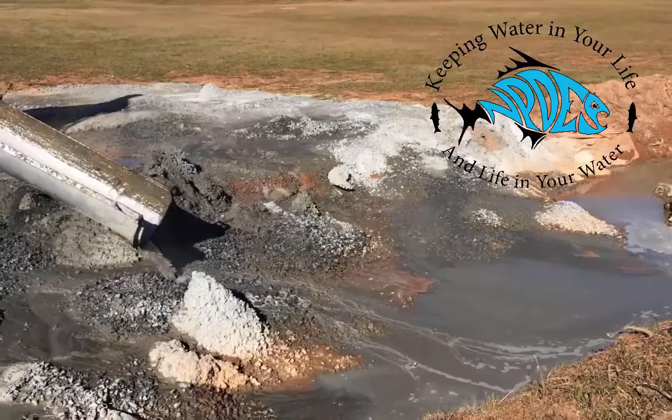Hey, this is Luke Owen with NPDES Training Institute, and today we're going to be talking about the Greenbook. There are a lot of changes that have occurred here lately, and as of January 1st, it's now official. And so I wanted to just cover a few things so that you all know what to expect this coming year and all that.

So anyway, if you're watching this video, you're watching it because at one time or another you expressed an interest in being certified in Georgia. I want to try to give you the information in a way that's going to help you understand how to use it in the field. And that's really the nature of what we do and what I do. I really work hard at trying to make this a program that people appreciate, number one, because it really does give us really good water quality and the ability to fish and all the wonderful things we like to do in the water, whether it's water skiing and that kind of thing.

But also as we're doing that, understanding that there's some liability out there associated with land disturbing activities and construction sites. And there's no need for it to be a harsh program. If you know what to do, you're doing the right thing out there, you're trying to follow the rules, then we all should be working together. This is my take. I really want people to be able to work together, because we all want clean water.

Of all the people I've trained, I've talked to a lot of people. I've never found one that says they like dirty water. And that shouldn't surprise you. It sure doesn't surprise me. It's just sometimes we disagree on the rules and regulations that govern those types of things. So we need to find out how to use these regulations in a way that's going to benefit our creeks and streams and also protect us as we're involved in a program, construction, that can actually hurt the environment if we're not careful with it when it does rain.

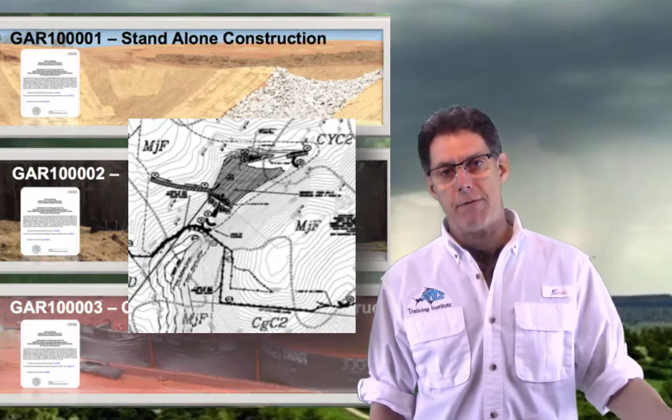We have another 5.5 months of using the 5th edition best management practices and that manual, and then also the new Greenbook, the 2016 version that we can go to. And with the little PowerPoint presentation that you're going to get at the end of this video, I'll give a little more explanation about the transition and what's happened over the last couple of years.

As far as the plan review checklist changes, there's a few that have to do with those 3 different checklists for the 3 different types of general permits, but there was another line item that was added to the checklist that had to do with buffers and variances.

And so if they wanted to put a line item in there that asks, is there an encroachment? And if there is an encroachment, is a variance required? So it's a good reminder for the plan reviewers and for the design pros to address buffers and buffer protection on land disturbing activities. So there are some other things that we'll be talking about, but I wanted to kind of end this little video just saying this.

As an American, I believe in the legal right to clean water. There's no way that you can look outside of the boundaries of our country and not know that it's a very effective program, and that to have the privilege of being able to go down and fish and swim and water ski and wakeboard in waters that are not highly polluted is a liberty in our country that we can never take for granted.

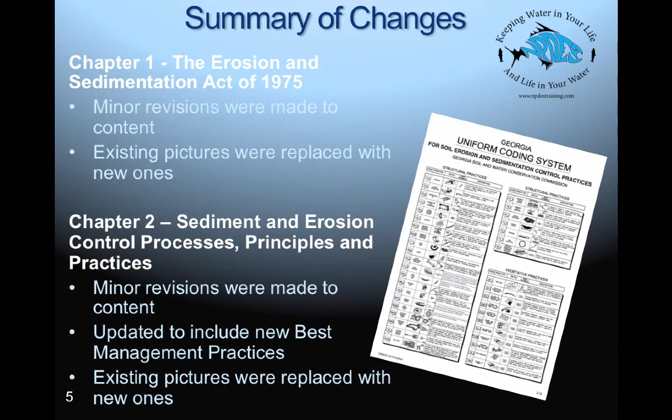In Chapter 1, there were minor revisions that were made that included changing pictures and things like that, just updates. The significant updates really did occur in 2014 to the Greenbook because it had been about 14 years since it had come out. Chapter 2, sediment and erosion control processes, principles, and practices, those were addressed. Again, minor revisions, changed a few pictures, that type of thing. Chapter 3, planning and plans.

Well, what they did here is they added low impact development as a section, and it needed to be added. Low impact development addresses the impervious surfaces within an urban area. And to be able to put a little bit of that water back into the ground rather than shoving it down to the bottom of a creek where it scours and causes a lot of erosion and property damage, it's an effort to try to infiltrate. And by doing that, you're removing the pollutants from going down to a creek. Also, there were things that were addressed in the state law.

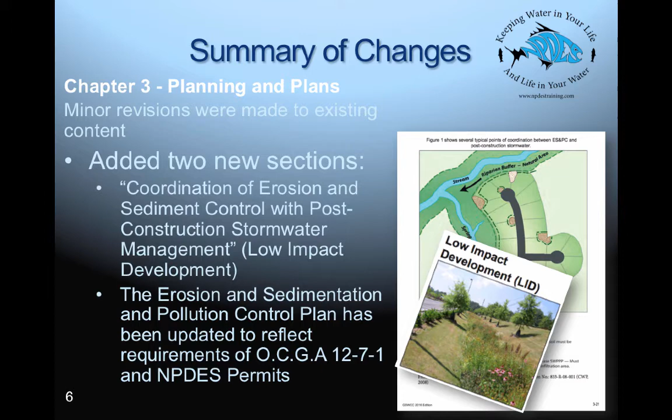The summary of changes that occurred to Chapter 4 were programs and process by which a city or a county becomes a local issuing authority. A person that's working for a city or a county that has chosen to adopt the state law into the ordinances, they actually enforce the state law on a local level, and they do that a lot of times through local permits. They do have the authority to step on a site wherever there is any kind of land disturbance going on as defined in the Act, and address those things. So that's talked about in that section. Highly recommend you read that.

And then sources of assistance and resources. Basically what happened here, a lot of changes. Why? Back in 2000, the internet wasn't such a big deal. It is today. In the 6th edition, it just addresses how the districts, the soil and water conservation districts, the Georgia Soil and Water Conservation, the EPD, how those district boundaries have changed.

And of course, the economy, when it went south on us back in about 2008. So anyway, these are changes that you can see here and click on to get information that you might need to have. Now, here we are at Chapter 6. This particular slide is just going to summarize what's changed. After this, we're going to actually address each one of these categories.

The revisions, I've just thrown up a couple of examples here where sediment barriers, the actual uniform coding symbol of SD1 is not changed, but the Type A, the Type B, the Type C silt fence that we're so familiar with is being addressed here as sensitive and non-sensitive. We'll talk more about that here later. There were absolutely new BMPs that were added. A few of those are represented here as a seep berm and a temporary sediment trap.

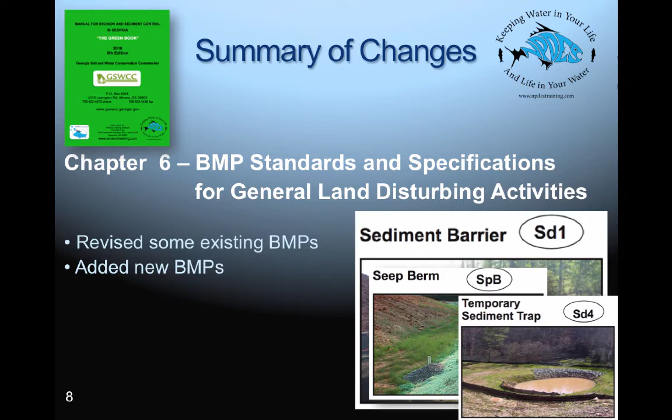This one, the removed performance criteria, that again kind of gets into what happened in the past when the 2014 Greenbook came out. There were some folks that didn't quite like what had happened. And so a lot of that stuff was removed. And so we do definitely have a better Greenbook now than we had with the 5th edition. So just testing standards were removed for the most commonly used BMPs.

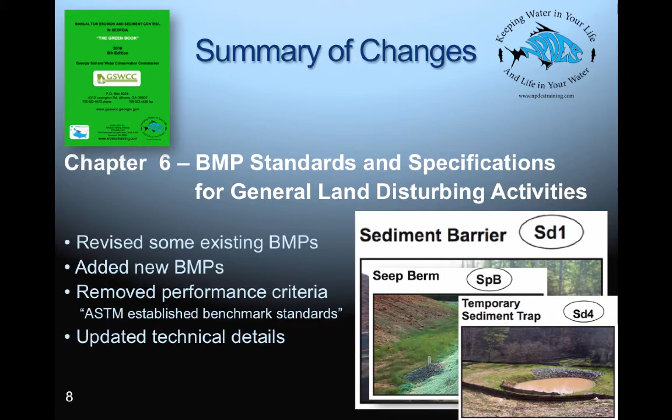And then along the way, technical details of BMPs, since so many things have changed. More alterations of BMPs like tackifiers. You know, there's 5 different types of tackifiers. Those types of things are addressed in the new Greenbook. And like I say, we'll see what those are.

So getting into what the revisions are, there's basically 4 BMPs that were revised. We'll see each one of these in more detail. But matting and blankets has actually been taken out of the 6th edition Greenbook. And it's been replaced by slope stabilization products. And you could read more about that on page 6-69.

Tackifiers and binders. Tackifiers, TB, that uniform code symbol is no longer there. It's been replaced by TAC. Polyacrylamide is no longer a standalone BMP uniform code symbol. You will not see it. And since polyacrylamide is used two different ways, one is a tackifier and then one is a flocculant coagulant, it was split up. And then sediment barriers, like we already mentioned, into sensitive and non-sensitive.

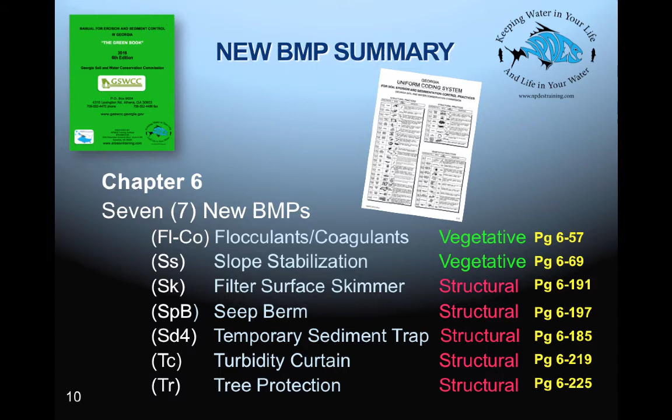So when it comes to the new BMPs that were actually added to the Greenbook, here they are. We had two new vegetative BMPs, referred to here as flocculants, coagulants, and slope stabilization. And then we had others here: surface skimmers, seep berms, temporary sediment traps, turbidity curtains, and tree protection that were added to the 6th edition.

The testing standards that were removed from the Greenbook involved check dams, channel stabilization, slope stabilization, tackifiers, sediment barriers, and inlet sediment traps.

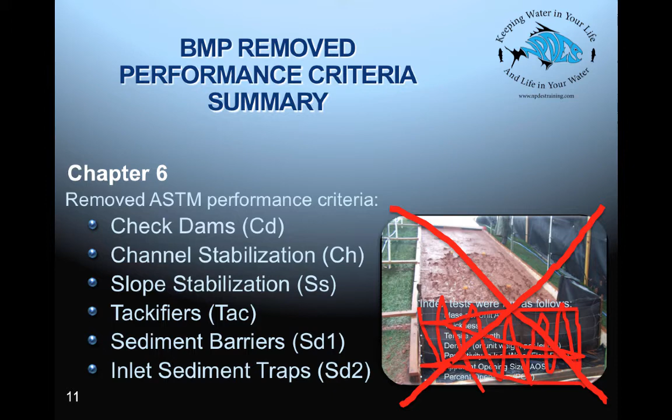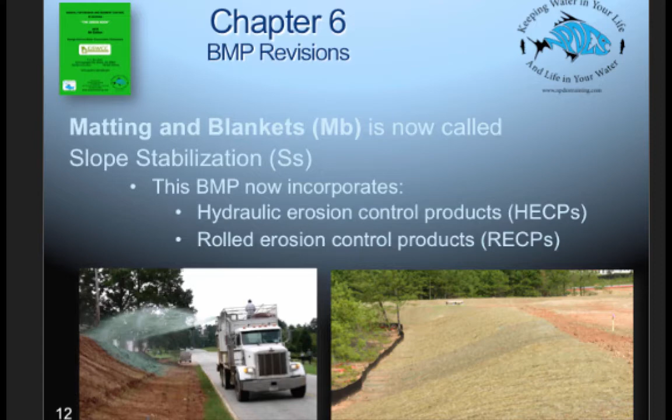So talking about matting and blankets, they're now, of course, called slope stabilization products, and basically kind of split it up into two different types of mats and blankets that you can use. So to stabilize a slope, you can use hydraulic erosion control products and rolled erosion control products. In these particular BMPs, you really need to look at the manufacturer's specifications for installation and maintenance of those.

When it came to these new BMPs, a lot of technology has come about, and it's really good that Georgia picked up on that. And so they've addressed that by making sure that there's a lot of different variations of some of these BMPs that are very commonly used. So tackifiers and binders, again, that uniform code symbol was removed and replaced with tackifiers. The new Greenbook, 2016 Greenbook, actually has added 5 different types of tackifiers, TAC 1 through TAC 5, and we'll talk about those in a little more detail here.

Synthetic polymers are addressed as TAC 1, organic polymers is TAC 2. The practice is intended for direct soil surface application to sites where you need to establish vegetation in a pretty timely fashion. It may not be feasible or where vegetation cover is absent or inadequate. Such areas include construction areas where plant residues are inadequate to protect the soil surface and where land disturbing activities prevent the establishment or maintenance of vegetated cover.

When it comes to maintaining these 5 different variations of tackifiers, the Greenbook states that the tackified areas need to be checked after every rain event. And that's absolutely true with the experience that we have here with tackifiers. Of course, rain can maybe get underneath an area that was treated and cause some problems.

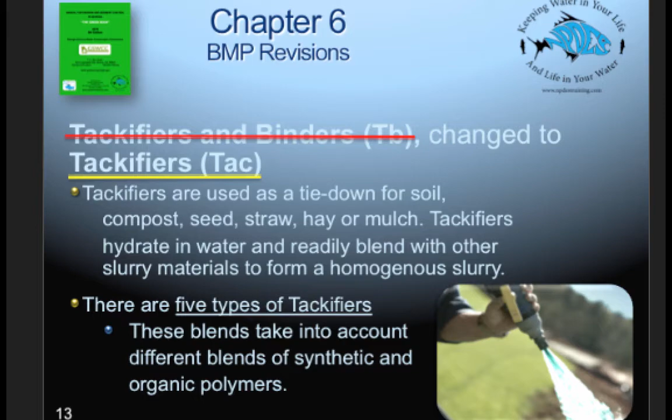So you just want to make sure that you're staying on top of it. And then periodically inspect them. People walk on them. As you put a tackifier on the soil, if they're disturbed, then that can create some problems if it rains. Just reapply the polymer every now and then as you need it.

First variation of tackifiers, type 1. Synthetic polymers, their application rates need to conform to the manufacturer's guidelines like they all do. Anionic forms of PAM, polyacrylamide, is really a big deal. Anionic polyacrylamide is a negatively charged polymer, and it's environmentally safe in the sense that it does not attach itself to fish gills. It does a great job of attaching itself to sediment particles.

Of course, polymers can also be used to anchor mulch. So if you use anionic polymers incorrectly, you can still cause some damage. So it's real important that you follow the manufacturer's specification with all of these polymers to make sure that they're not going to cause any damage.

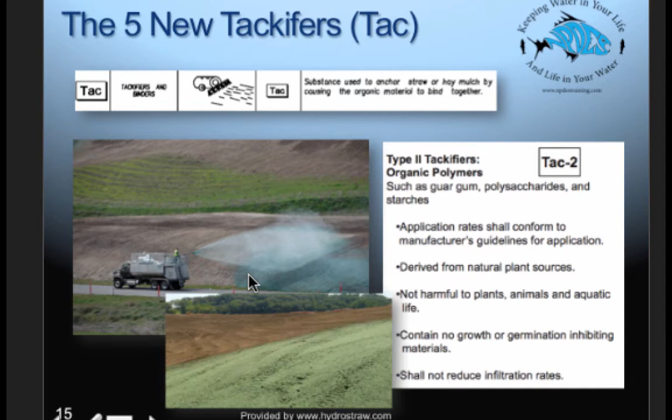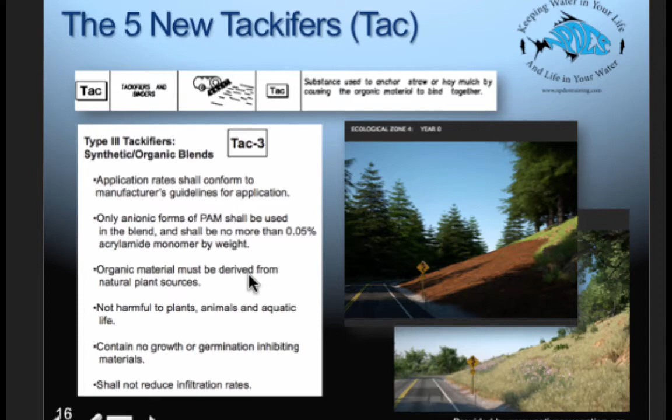Type 2 tackifiers are organic polymers. So you'll see here in the next few that there's a combination of synthetic and organic. Another application is synthetic and organic blends, as already mentioned. Again, only using the anionic form since it's environmentally safe. And make sure you follow the manufacturer specifications for mixing and that kind of thing.

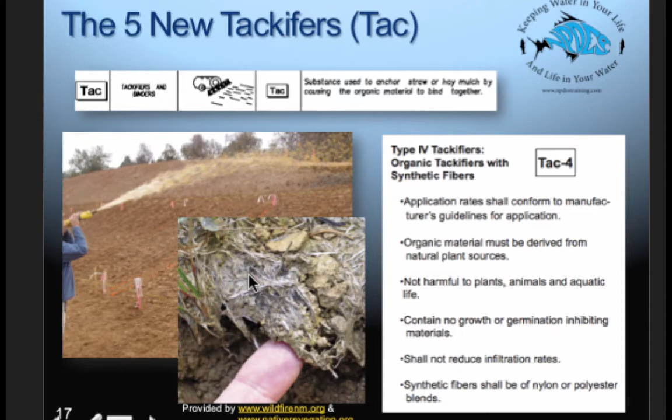The next one, type 4 tackifiers, is organic tackifiers with synthetic fibers. Application rates need to conform to the manufacturer's specifications. Organic material must be derived from natural plant sources. Then type 5 is synthetic and organic blends with synthetic fiber. Very much the same thing. Just want to make sure that you apply it correctly and that it does match the soil type. It can really help keep sediment out of the creek.

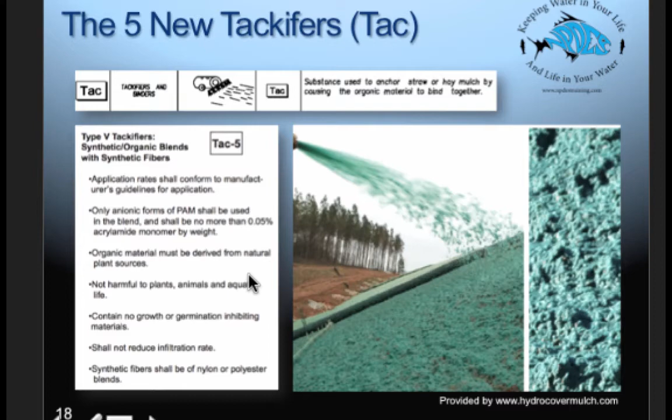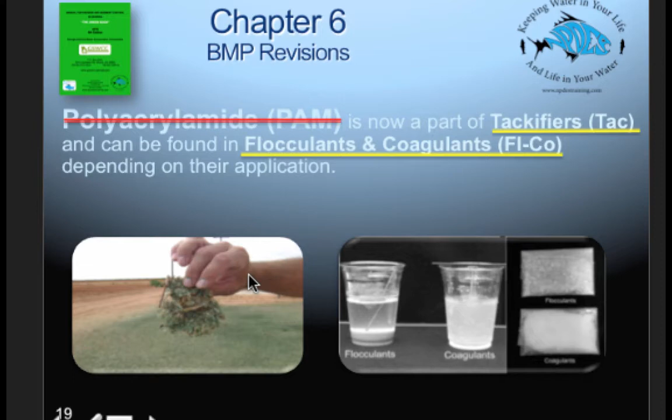The next one, PAM, as we already mentioned, polyacrylamide is now part of tackifiers, which we just discussed, and can be found also as a flocculant and coagulant. You can see here on the right-hand side of the slide, you have flocculant and/or coagulant, where it actually does remove suspended sediment from the water and causes it to be a sticky type of product where you can filter it. And as you can see here on the left-hand side with that glass, it settles quickly too. So you're essentially making a floating clay particle into a sticky, heavy sand grain.

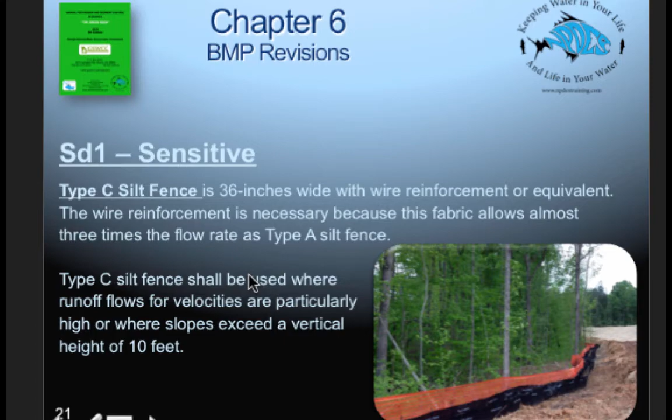Sediment barriers, as I mentioned earlier, type A, type B, type C. Type A and B are considered non-sensitive, and type C is considered sensitive. Sensitive barriers, nothing's really changed there, 36 inches wide with wire reinforcement or equivalent. The wire reinforcement is necessary because the fabric allows almost 3 times the flow rate as a type A silt fence. To have that structure behind it really helps a silt fence stay in good shape. And as you can see with this picture here, the buffer behind there was beautiful. Never got an impact from any discharge, although it was down from a very steep cut and fill slope.

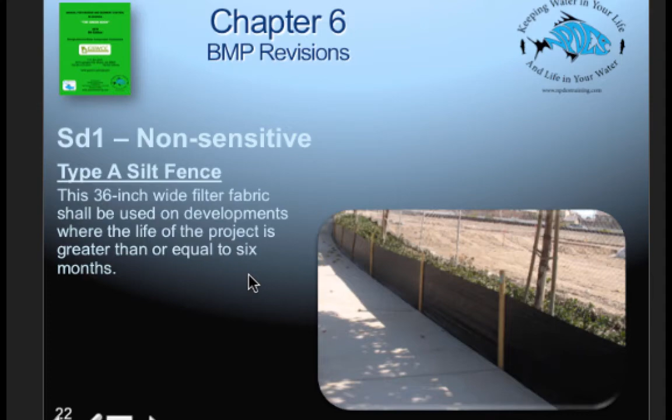Type A silt fence, 36 inches wide filter fabric. You can see here with the stakes, it's on 6-foot centers, no wire reinforcement. And then type B silt fence, it's a smaller silt fence. It's not as tall. As you can see here, only 22 inches wide. This filter fabric allows the same flow rate as a type A silt fence, but it's just smaller. And of course, the application of this would be limited to minor projects or around small building sites. Type B silt fence is very appropriate for use inside of common developments, residential as well as commercial developments.

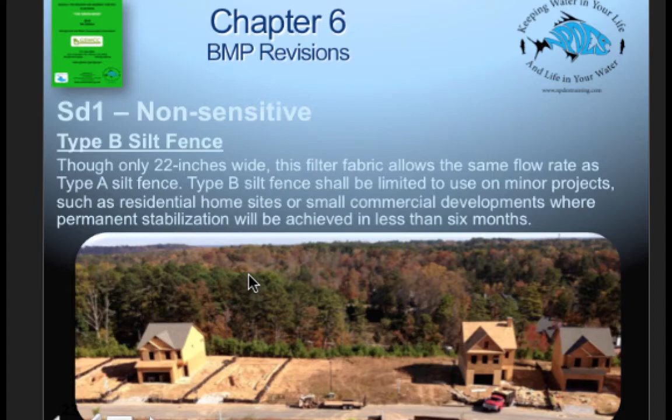Floating surface skimmer devices. This has been written into the general permit when it came out, and it is a federal rule. It's not just something Georgia deals with, it's something everybody in the entire country now has to deal with. And there's certain manufacturers of this, but we really have some pretty lenient ways of applying this technology to our construction sites. We just want to make sure that we do install them correctly, and they actually are going to dewater appropriately.

There's 2 things you're trying to do here with a floating surface skimmer primarily. You're trying to dewater at a slow pace so that it doesn't cause a lot of scour and erosion as it leaves the pond. And of course, you're trying to dewater from the surface. And by doing that, the thought is that you're taking cleaner water on top, where some of the heavier solids and clay, if it's had time, has settled to the bottom.

So it's a pretty good thing if you can install them and maintain them correctly. We actually have a sediment basin class that we've offered twice, been very, very well received, and it's only getting better and better. We've got one coming up here in March, so we're excited to be able to have that.

And it'll really do a great job of teaching you how to install them and how to maintain them, instead of having to walk out there in the middle of a mud bowl where they might even be buried, just how to take care of those in an effective way. And different types of things to consider as you're designing.

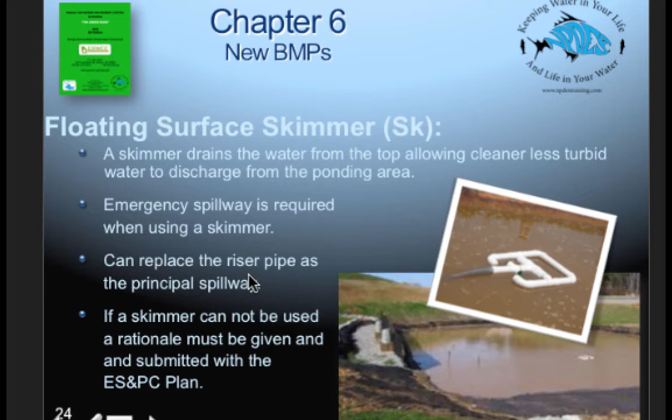Seep berms are a new BMP. They're essentially a long sediment basin, but yet they don't have an outlet where you just discharge directly through one hole orifice. You actually have several places along the way where it's going to seep into the subbase, and that's a great thing. That really does eliminate a lot of potential problems when you discharge from just one hole, an outfall from a detention pond, a temporary sediment basin, or a permanent detention pond.

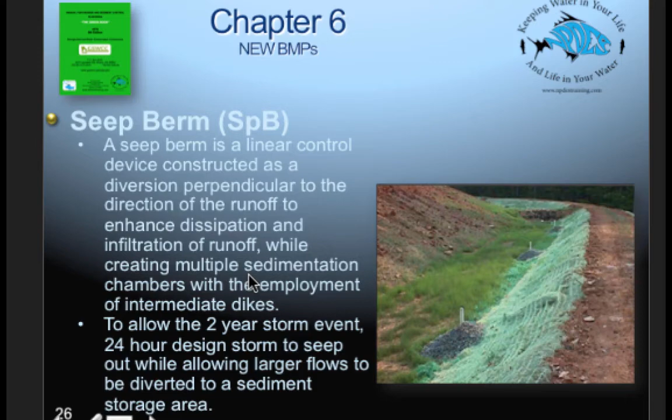So it's a linear control device constructed as a diversion perpendicular to the direction of the runoff. As you can see here at the base of a cut and fill slope, this can surround the construction site. It basically allows the contractor to open up the entire site at one time when you've got this seep berm around it. So when it does rain, it wouldn't leave the site from one place. It would just run off and be captured by the seep berm.

The specifications for seep berms, of course, are found in the Greenbook and address the top of the berm in feet, the bottom of the berm elevation, the top of the berm width, the height, the seep pole diameter, and distance from the top of the berm to the seep pole to be placed in accordance with that 2-year 24-hour storm.

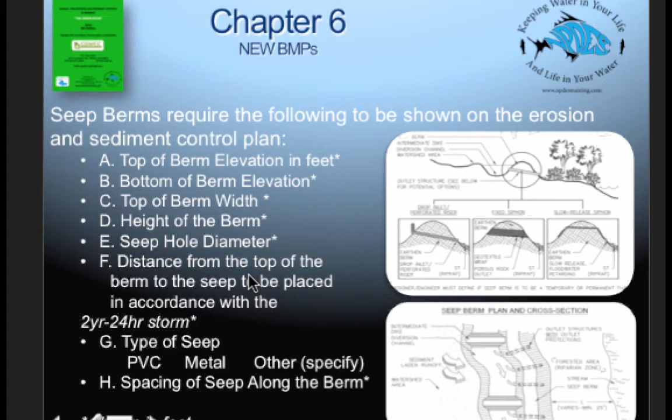Sediment traps, SD4s, are a welcome BMP to Georgia's Greenbook. Many people, unfortunately, were installing temporary sediment basins as sediment traps, and there wasn't really any clear guidance on how to do that. And so this basically is a device that you have to be very careful where you put it, because it can definitely overflow pretty rapidly. You don't have any kind of an outfall from this.

It just captures the water, and then the design, as we'll see here, 3 basic types of design will allow it to overflow over certain types of structures to help prevent the erosion and kind of control the flow. So for a temporary sediment trap, that's SD4-A, limited to small areas, less than an acre. The maximum lifespan is 6 months. And silt fence, straw bale barriers, and grass filter strips are used to polish the overflow waters, to help remove the sediment from the device.

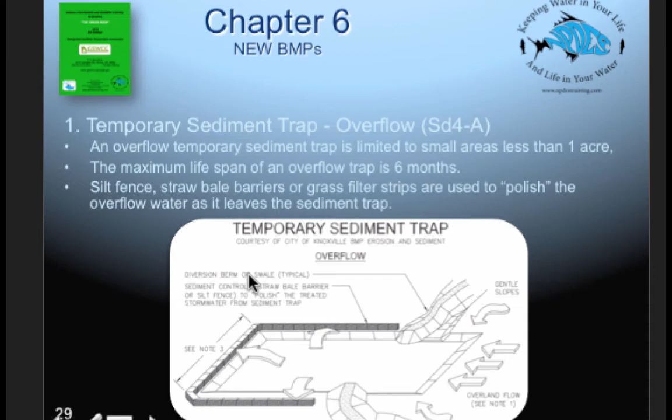With a temporary sediment trap, that's a combination outlet, SD4-B. The combination outlet uses straw bales and silt fence to dewater it. Proper installation and staking of the straw bales and wire backing of the silt fence are required for the materials to resist 1 foot or more of ponded water. The combination straw bale and silt fence outlet is limited to 1 acre of total drainage area and has a lifespan of less than 1 year.

So that's a pretty good duration for a device like that, as long as you maintain it, and that's the key. And then this type of device requires a lot of maintenance though. And as I mentioned, all of these BMPs, if you don't maintain them, they're not going to work. And so a developer, the permittee, really does have to go into installing and maintaining BMPs knowing that it's going to cost a little bit of money, especially with years where you've got a lot of rain. And since we just came out of 2015, we got hammered here in the last 6 months, so it's been a challenge.

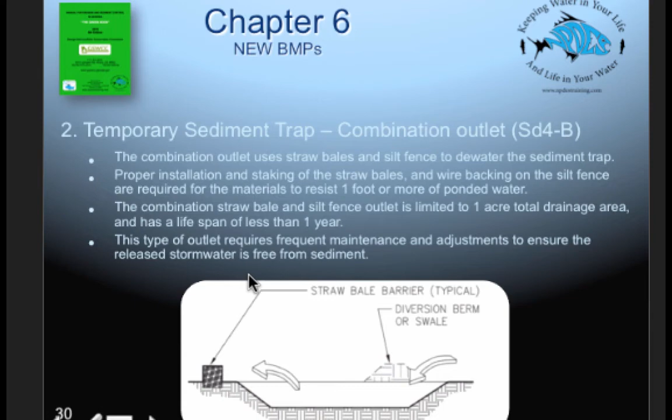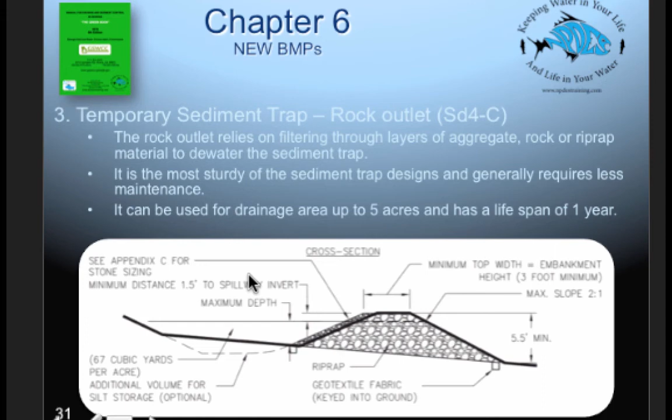With SD4-C, the rock outlet relies on filtering through layers of aggregate, rock, and riprap to dewater it. Again, it kind of polishes it. It is the most sturdy of the sediment trap designs and generally requires less maintenance. It can be used for drainage areas up to 5 acres and has a lifespan of up to 1 year. On temporary sediment traps with rock outlets, the rock outlet relies on filtering through layers of aggregate, rock, and riprap.

It's the most sturdy of all of them. Turbidity curtains, another BMP that's welcome. We didn't really have anything like this, and we certainly needed it. A floating or stake barrier installed within the water. It may also be referred to as a floating boom, a silt barrier, or a silt curtain. It's not to be used as a sediment storage device. Again, there's only certain BMPs that we can use for sediment storage calculations as design professionals.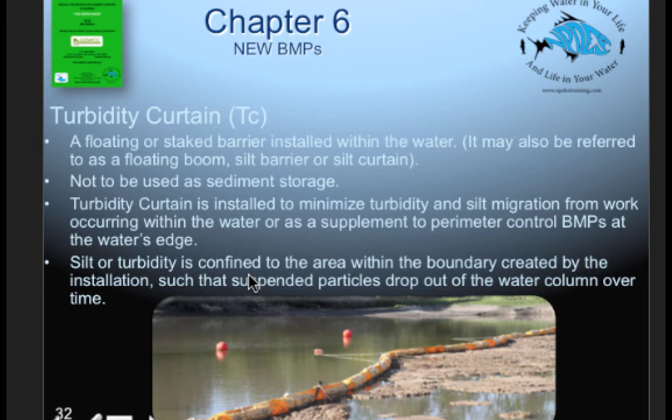Turbidity curtains are installed to minimize the turbidity and silt migration from the work area into a water of the state or U.S. water. And of course, it's illegal to discharge pollutants into a water of the U.S. beyond a certain limit, and Georgia has some very strict limits on that. Silt or turbidity is confined to the area within the boundary created by the installation. So any suspended particles that want to get away are going to be kept back closer to the site because of the curtain. It's a great BMP. Here's a little more detail about it that you can find in the Green Book.

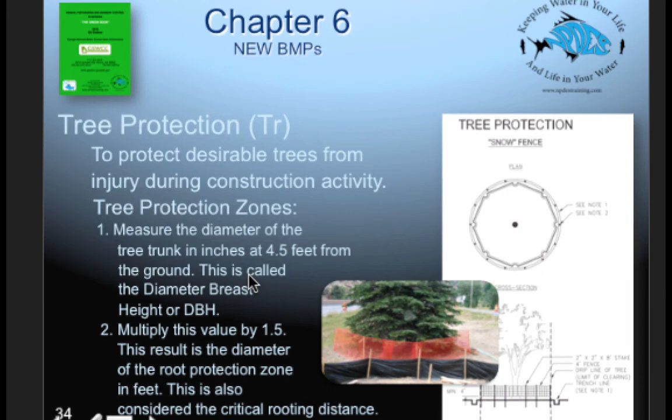And then tree protection, that's another BMP we really needed to have, and it gives specific directions on how to install and maintain these best management practices to protect trees and tree save areas.

Okay, last but not least, we actually have a new procedure. It's a brand new procedure on using alternative best management practices. The 5th edition Green Book really didn't have a great way of dealing with it. But the 6th edition that came out in 2014 was pretty good. For the most commonly used BMPs, people were going to have to get them tested before they could be used and really prove that they were going to do their job. We don't really have that type of rigorous test, but we have some pretty serious tests here for being able to add a best management practice onto the qualified products list in Georgia.

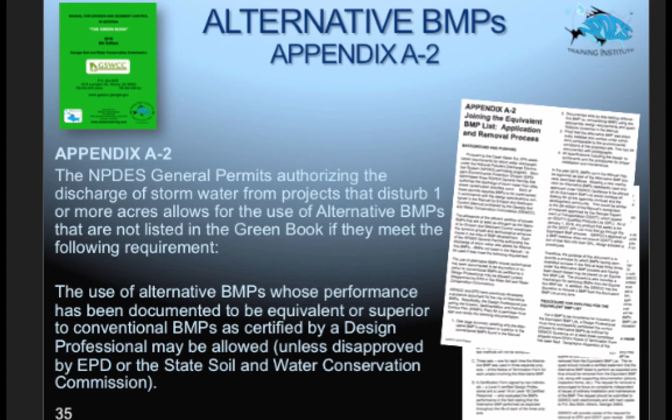So as it mentions here, you can read the text a little bit. I've made copies here of what Appendix A2 looks like. I highly recommend that everybody read this, especially if you're a design pro that wants to put in new BMPs. Each of the NPDES general permits, and we have 3 in Georgia that authorize the discharge of stormwater, that would use BMPs not listed in the manual have to follow a certain procedure to be able to add BMPs consistently to their projects. The use of alternative BMPs whose performance has been documented to be equivalent or superior to conventional BMPs, as certified by a design pro, may be allowed if you follow the procedure.

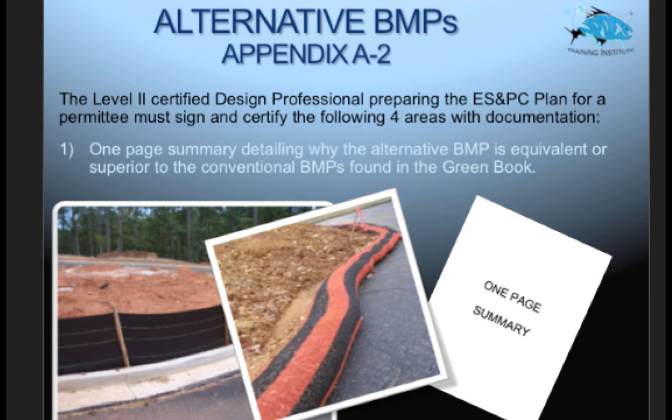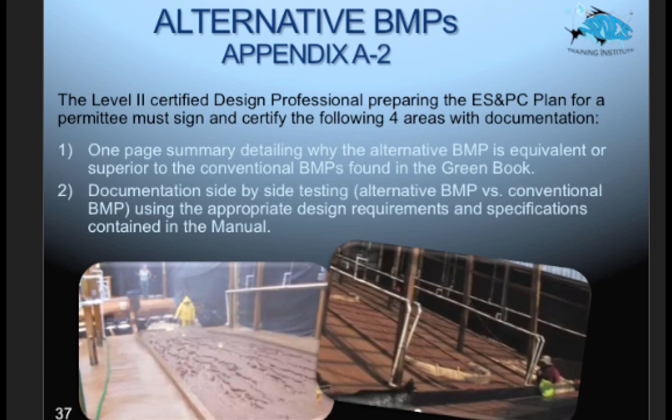So what is that procedure? Well, the first thing you need is a 1-page summary that details why the alternative BMP is equivalent or superior to the conventional BMPs found in the Green Book. The second step is documentation: side-by-side testing of alternative BMPs versus conventional BMPs using the appropriate design requirements and specs contained in the manual for erosion and sediment control. And then you need proof that the alternative BMP was previously installed and worked. That proof doesn't have to be a lot of rigorous tests and can be documented with photographs. So I suggest that you contact the Georgia Soil and Water Conservation Commission.

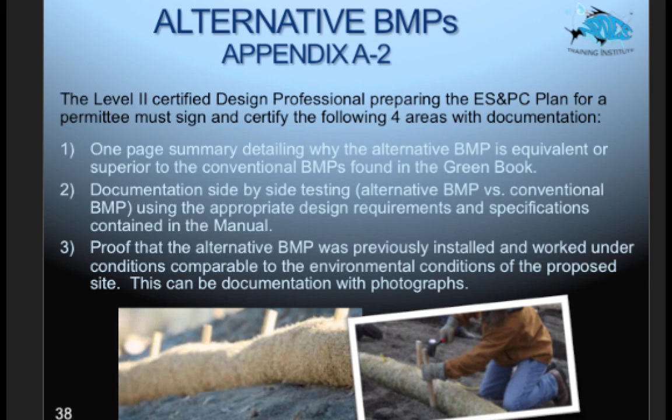And then step 4 is that all specs, including the design requirements and the procedures for proper installation and maintenance, need to be identified. And the BMP has to be used on 3 projects where a successful notice of termination has been submitted. And there's a lot more detail, again, in the appendix of the Green Book.

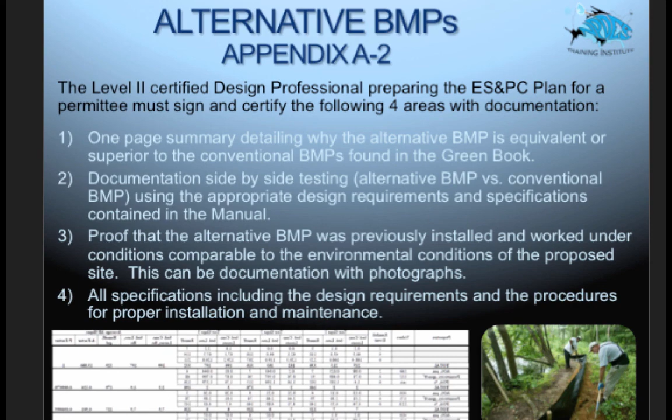At the end of the day, always work at showing your intent to comply with the permit. Always address the design. When it rains a half inch and you do your inspections, be truthful, write down what the deficiencies are, write down whatever violations you might have, whether they're water quality and you discharge beyond your discharge limit. And then write down what you're going to do to fix it, and then fix it. And just to prove you did it, take some pictures.